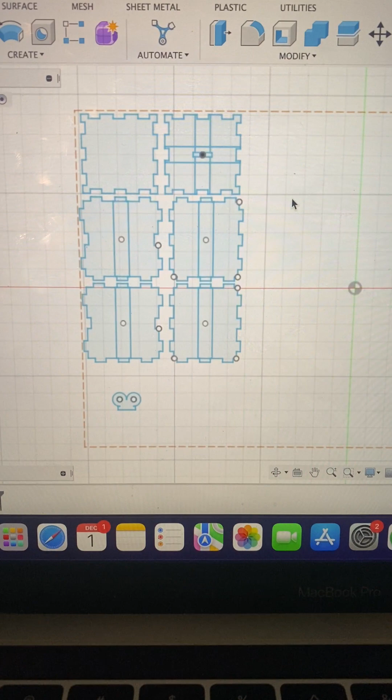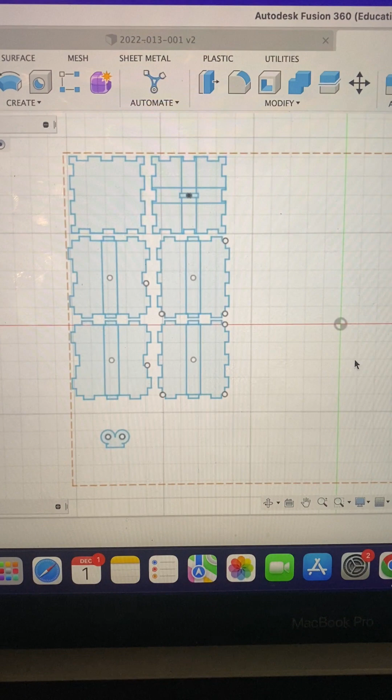This is my video documentation for Design for Holiday that I did in Fusion 360. For the holiday of choice, I chose to go with a decoration for Christmas. It's the biggest holiday in my family and the one I enjoy celebrating the most, and I wanted to make a fun decoration for my new apartment out here in Colorado that showed off some of my Fusion 360 skills while still staying merry and festive for the holiday season.

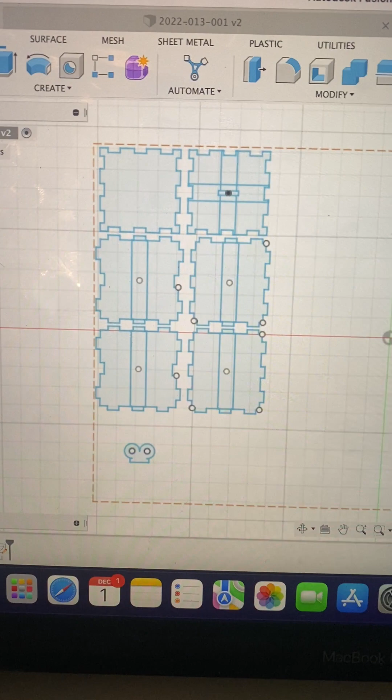For laser cutting, the first thing I did in my Fusion 360 file was make a construction line with the size of the bed. In this project I really didn't need it, but in previous projects I ran into trouble fitting everything on the laser cutting bed, or more specifically, the piece of wood I was using. So I always think it's very important to visualize it for myself so I knew I wasn't going to run over and that everything could fit, which in this one I stayed pretty small, so it wasn't that big of an issue.

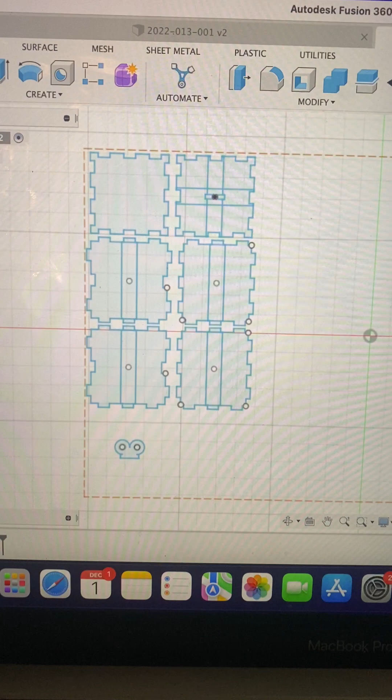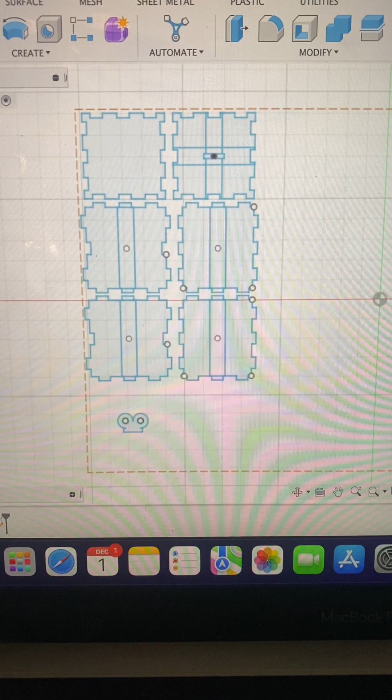For this design there's no 3D model since it was going to be laser cut, so this is just the drawing I did. I then exported it as a DXF, opened it up in Illustrator to color code the lines, these internal rectangles. I ported them over as hatches because I wanted them raster etched, and then brought it into the BTU and cleaned everything up in Rhino before eventually getting it laser cut out and fully assembled. I am very happy with some of the design.

There is one small mistake in the design file. These teeth right here that actually go out should instead be grooves that come in. It's a very small design flaw. Otherwise the box fits together perfectly, but it is a little noticeable in the final product that I'll show you in a second. For this I wanted to make the box manually instead of using a design like MakerCase.

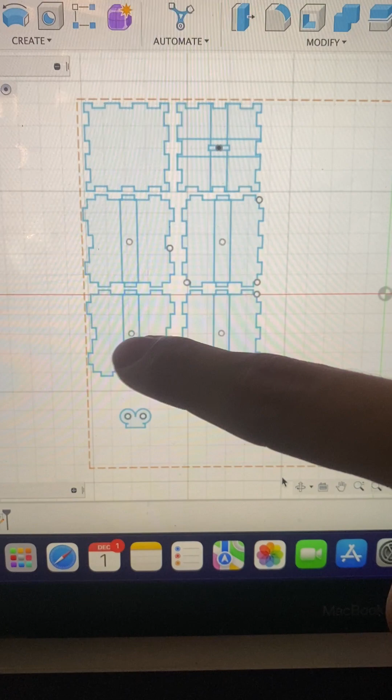If you can't tell from the drawing, it is actually a gift. I wanted to make a gift holiday box. I thought it would be a really cute way to give family members gifts for Christmas. Instead of wrapping them in a cardboard Amazon box, I thought it would be cool to make a custom wood box with these raster etched sections being like the little ribbons wrapping around it. I thought it'd be a very cute and wholesome little design.

This bottom piece right here is meant to be a ribbon or a bow. I'm not super thrilled with how it came out. I wanted to keep it simple, just to make the printing easier, and make sure it came out looking at least relatively close to what I was hoping for. It ended up being much too small, and I think I could have done something a little more creative with a fit point spline instead of just circles, which is what's used here.

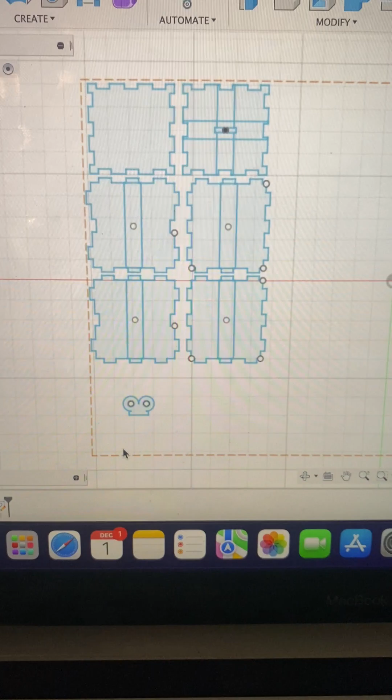Perry and I were playing around with different power and speed settings in the laser cutting program, and did something a little slower with a little higher power, as oftentimes with raster etches you have to do it multiple times in order to get a really good and clean outcome.

I think it presents as a present and achieves the goal I wanted from this design for holiday idea. So there is my final. Yeah.